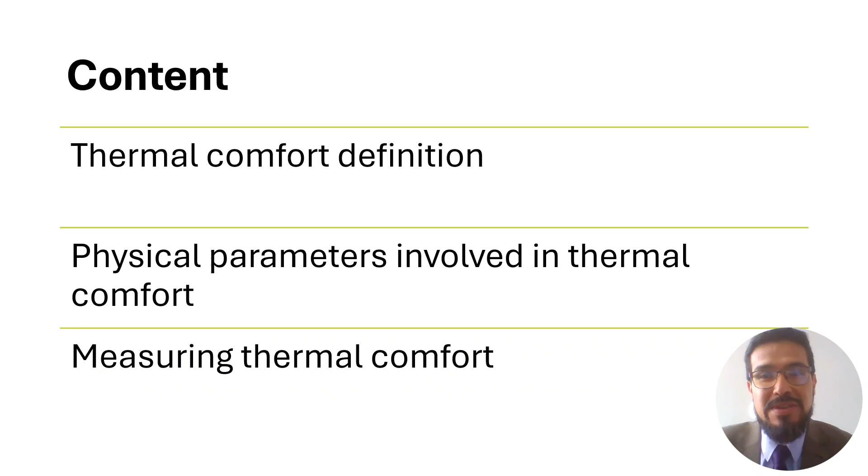In this lesson we will define thermal comfort, talk about the physical parameters involved, and present the two indexes to measure thermal comfort. By the end of this lesson you will be able to define thermal comfort, to list the factors affecting it, and also to name the two most common indexes.

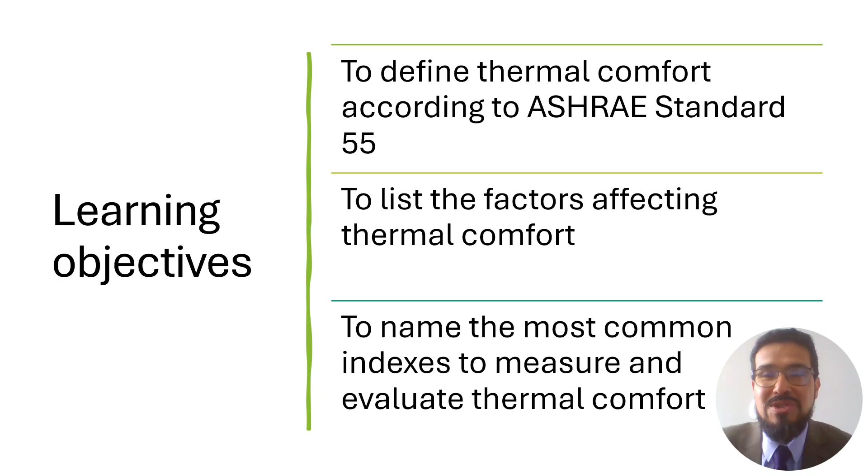So what makes you feel comfortable inside a building? Maybe you think about many things, many possible combinations, but remember that we're talking about HVAC systems in this course. So there are three parameters that are going to be related: temperature, air velocity, and humidity. And we will say that what makes you feel comfortable is the range of temperature, range of humidity, and range of air velocity that makes you feel a neutral sensation.

So first start with a formal definition: according to ASHRAE Standard 55, thermal comfort is that condition of mind that expresses satisfaction with the thermal environment and is assessed by subjective evaluation. So this is more or less whether you feel warm or cold, or an indoor environment is too humid for you.

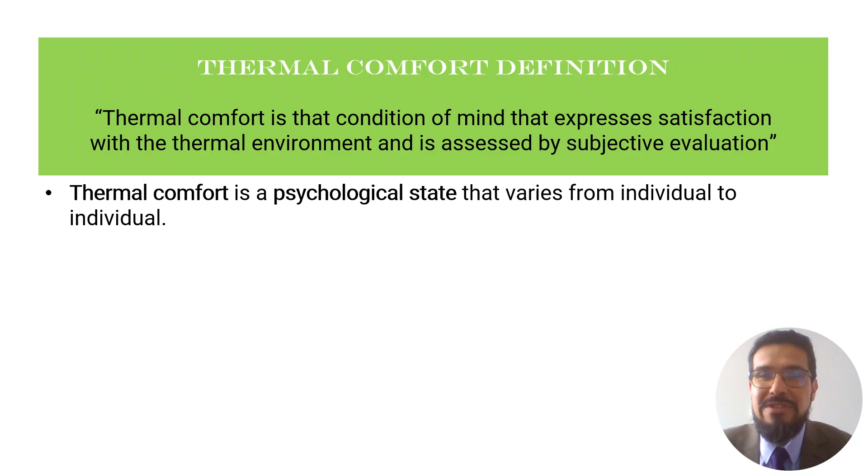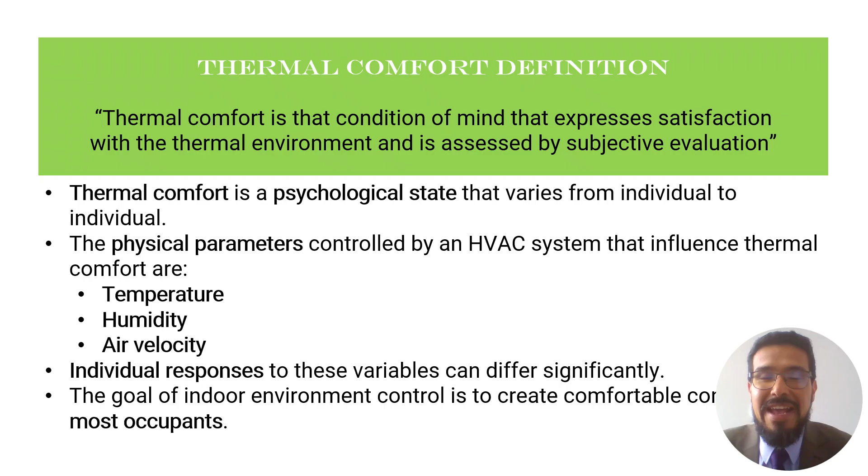So from this definition, we say that thermal comfort is a psychological state. So the conditions will be different from person to person. And let's remember, there are three parameters related to it: temperature, humidity, and air velocity. Those are related to the HVAC systems. From our own personal experience, we know that not everyone feels warm or cold in the same conditions. But even with differences between the persons inside a building, our goal should be to create indoor environments that are comfortable for most of them.

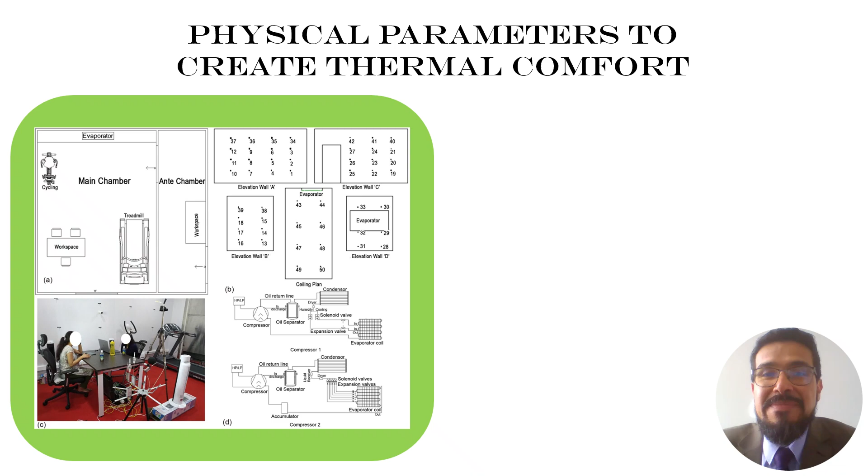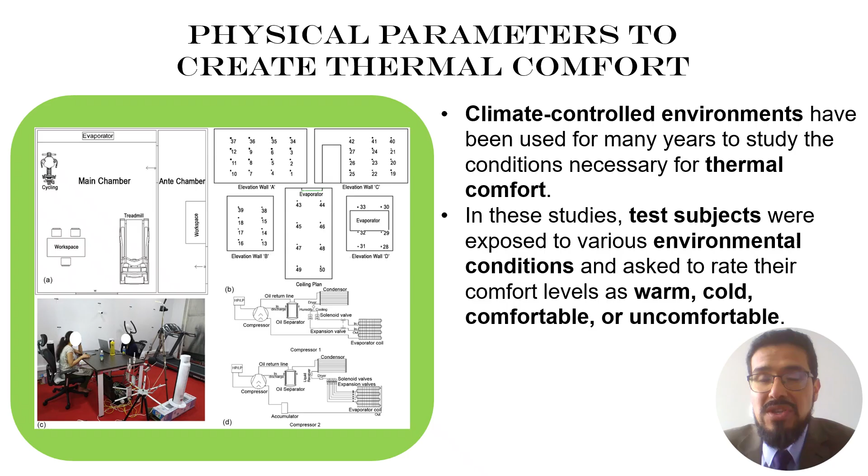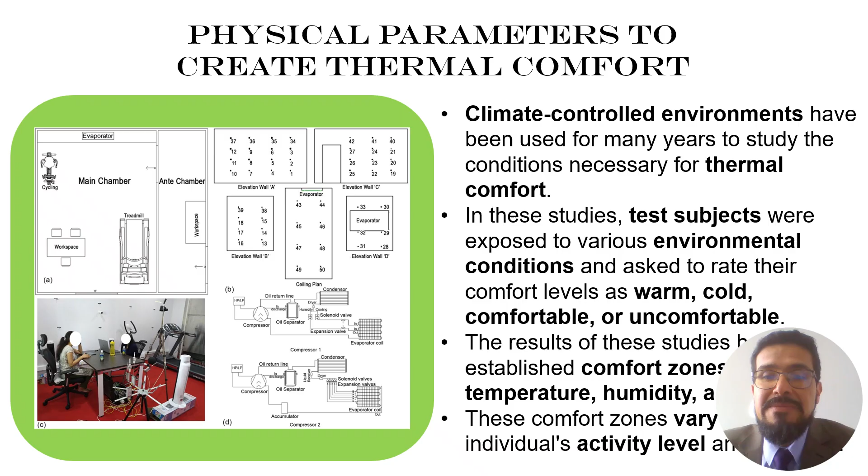To assess this range of velocity, temperatures, and humidity, many experiments were run. In these experiments, professionals used climate-controlled environments and exposed test subjects to different environmental conditions. In each of these conditions, they asked the subjects if they felt cold, warm, comfortable, or uncomfortable. These results were used to assess the comfort zones in temperature, humidity, and air velocity. One important finding is that this range differs according to the activity level of the subject, and also according to their clothing.

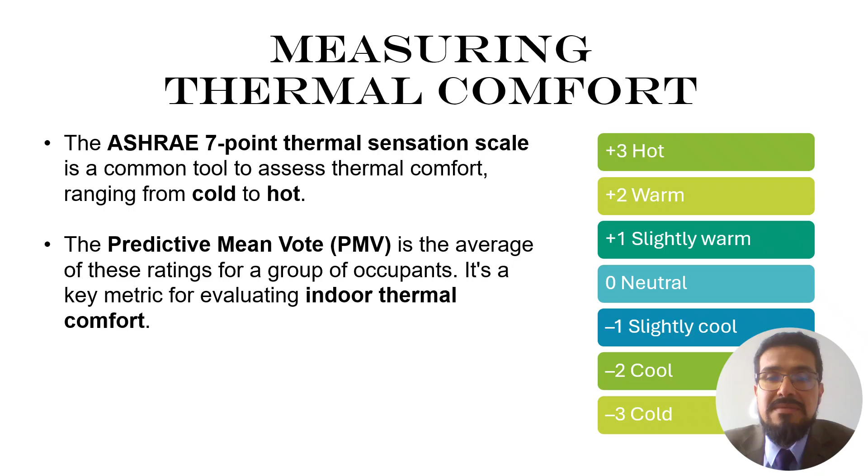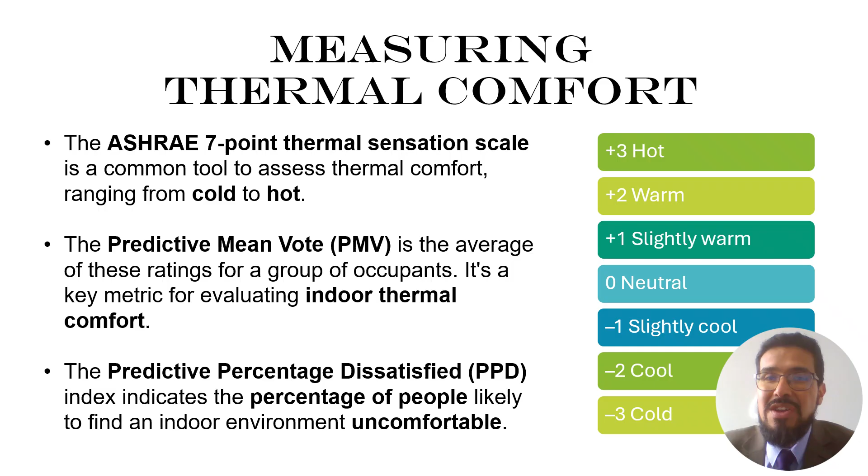In these experiments, they used the ASHRAE 7-point thermal scale, which goes from cold to hot. The average of the votes of all the test subjects in a specific indoor environment is called the predicted mean vote, and it's one of the indexes we are going to use to define thermal comfort. The other very important index is the predicted percentage dissatisfied. It tells us the percentage of people that are going to be dissatisfied in a specific indoor environment. So the combination of these two indexes is used.

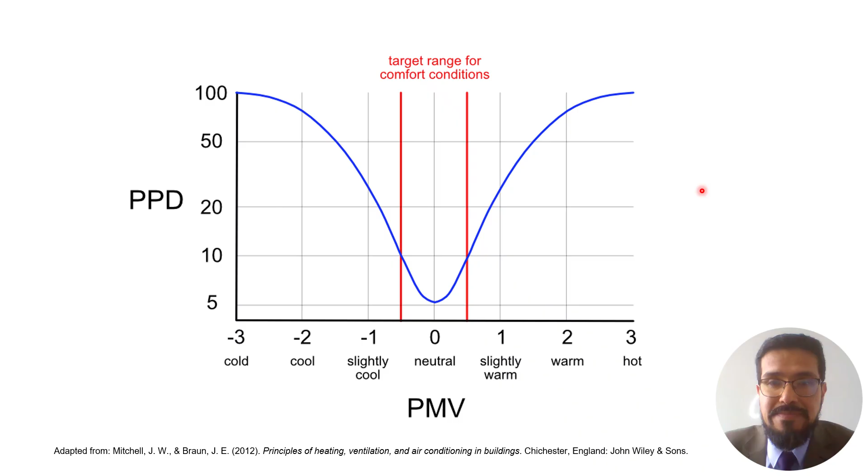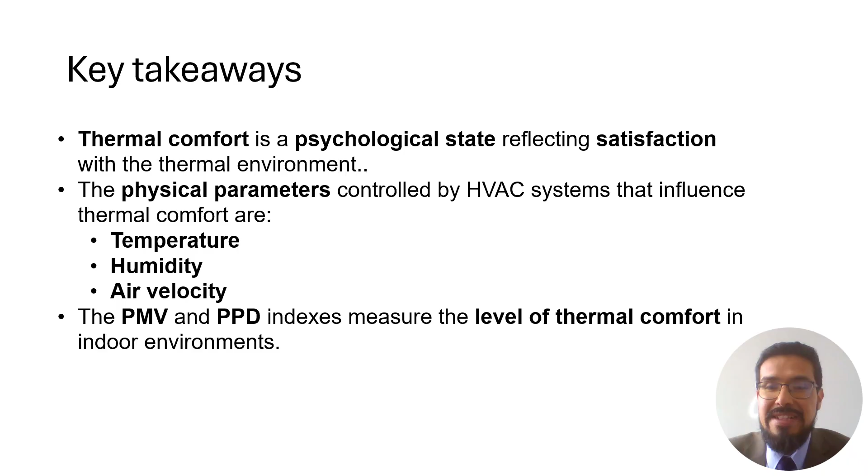So from this lesson we have some key takeaways. First, thermal comfort is a psychological state reflecting satisfaction with the thermal environment. The physical parameters controlled by HVAC systems that influence thermal comfort are temperature, humidity, and air velocity. The PMV and PPD indexes measure the level of thermal comfort in an indoor environment. And finally, building design should strive for 90% occupant satisfaction to ensure optimal thermal comfort.